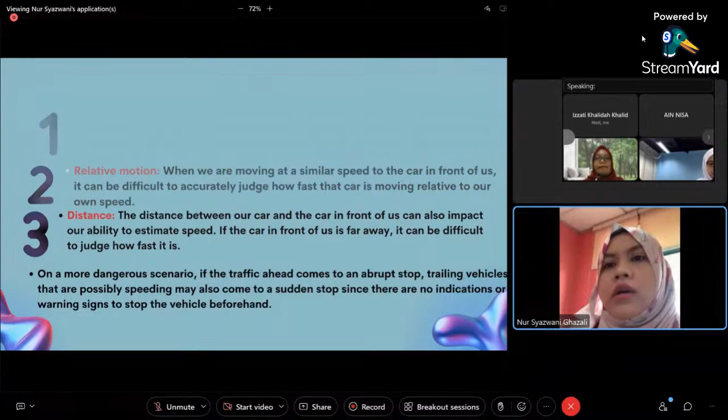Let's take a look at the existing warning system in recent car technology. Forward collision warning system uses sensors such as radar, cameras or LiDAR to detect vehicles or other objects in the road ahead. If the system determines that a collision is likely, it will issue an audio and visual warning to the driver to take evasive action.

This system has become increasingly common in new cars in recent years and is often standard or available as an option on many models. The FCW is very useful when the car is within a certain distance range of the front car. However, this technology cannot work when the car is out of sensing range.

We need to equip automobiles with sensors, which incurs additional costs for users. Other technologies such as the auto braking system also use sensors installed in the car to provide an auto stopping mechanism for the car, and it requires a short range distance to the front car to serve its purpose.

As a summary, for us to use this recent car technology such as FCW and auto braking system, we need to install these sensors into the vehicles. For new cars, it will be no problem because most recent cars already have sensors installed.

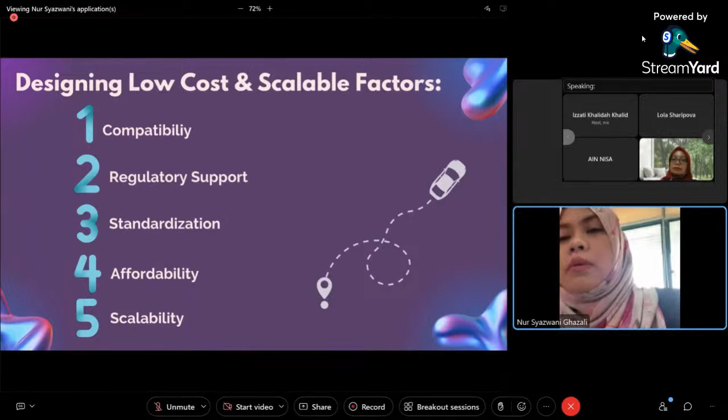Let's take a look at the methodology. There are a few research papers already published on how to calculate the safe distance between the front and the rear car, such as time to collision.

Time to collision is a measure of time remaining until a collision occurs between two objects. It is commonly used in the field of autonomous vehicles and advanced driver assistance systems. In this equation, d is the distance between the preceding and following car.

VP and VF are the speeds of the following car F and the preceding car P, and L is the length of the preceding vehicle. Using this time to collision, we can measure the time remaining until a collision occurs between two objects, because we want to estimate how long and when we should trigger the warning system.

This is the changing process of deceleration. It is divided into time frames: T1, T2, T3, T4. T1 is the reaction phase before performing the deceleration. Phase 2 is the coordination phase between the brake pedal and the vehicle. The combined time of these two phases is 0.8 to 2 seconds. Phase 3 is the stage of deceleration growth, with a value of 0.1 to 0.2. Phase 4 is the stage of stable uniform deceleration.

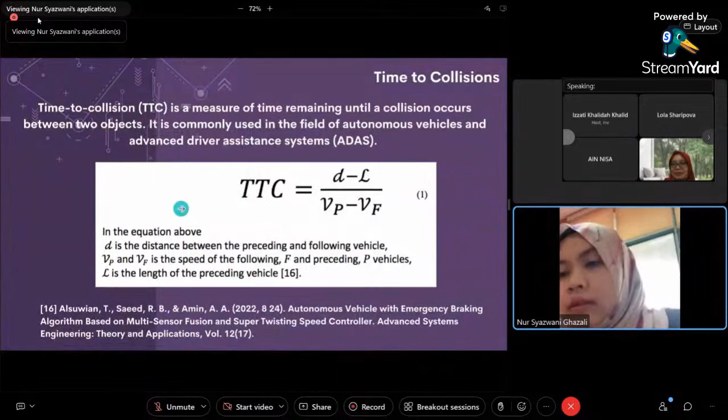T1 is basically the reaction time that the driver takes to perform, to just push the brake.

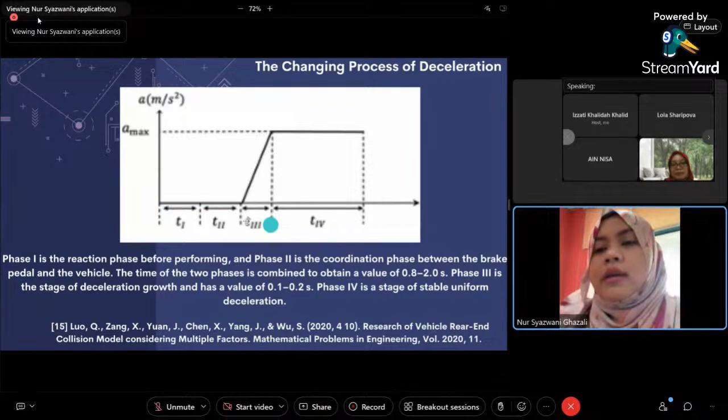Next, this is the formula for the safe distance. The safe distance is given by: (T12 plus T3) over 2, times V naught, where V naught is the difference between the speed of the front and back car. We can estimate the safe distance using this formula.

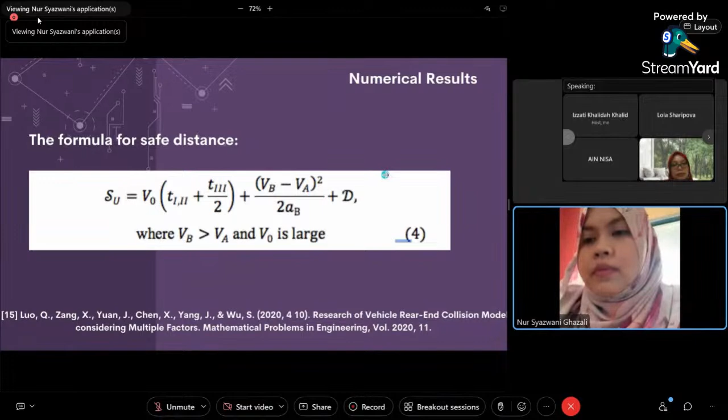By using this formula, we can generate a few cases of reaction time according to the minimum and maximum reaction time. So we create 5 situations according to cases. For case 1, T12 is 0.8 second, T3 is 0.1. For case 2, T12 is 1, T3 is 0.15, and so on accordingly. We change and manipulate these 5 situations to see what happens to the safe distance.

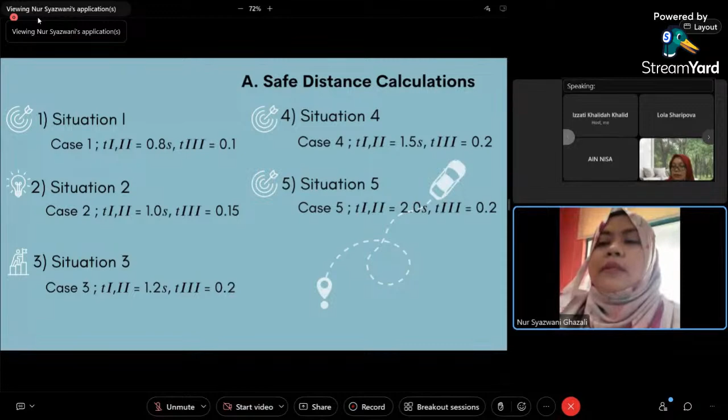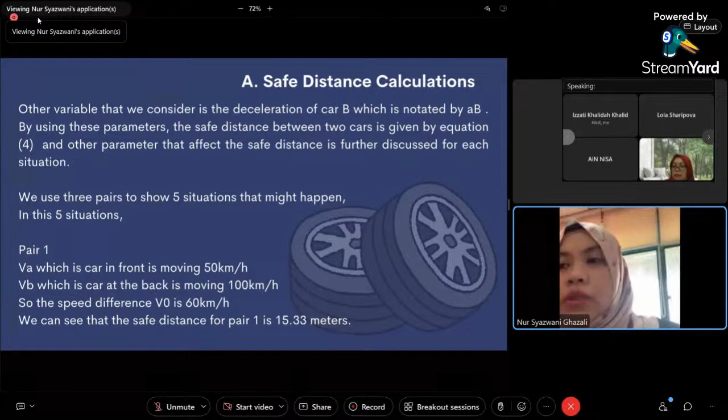Another variable we consider is the deceleration of car B, notated as AB. Using these parameters, the safe distance between two cars is given by equation 4, and other parameters affecting the safe distance are further discussed for each situation.

We use 3 pairs of vehicles, front and back, to show the 5 situations that might happen. In these 5 situations, pair 1 has the front car moving at 50 km per hour, and the back car (VB) moving at 100 km per hour. So the speed difference, V naught, is 60 km per hour.

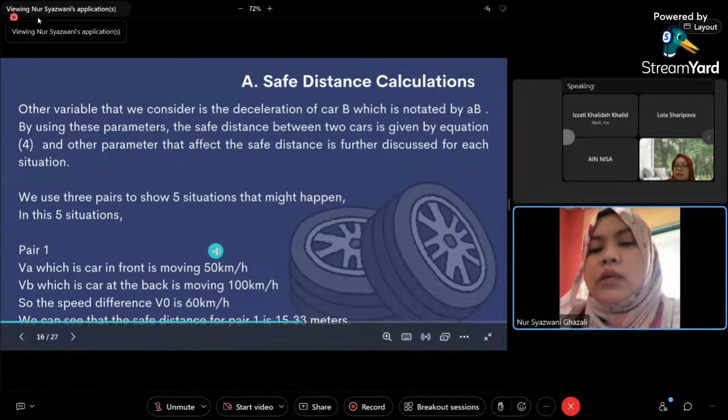We can see that the safe distance for pair 1 is 15.33. If we insert the values into that formula, we get 15.33. We repeat this for the 3 pairs across every situation with the parameters we set. The safe distance reacts to changes in the front car speed and the back car speed. We also manipulate the reaction time, which gives different safe distances.

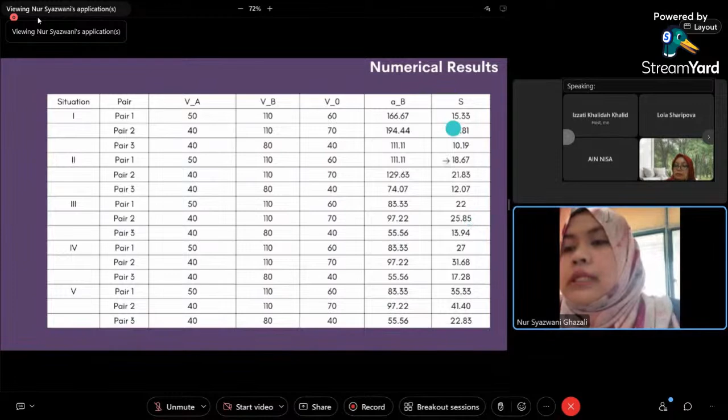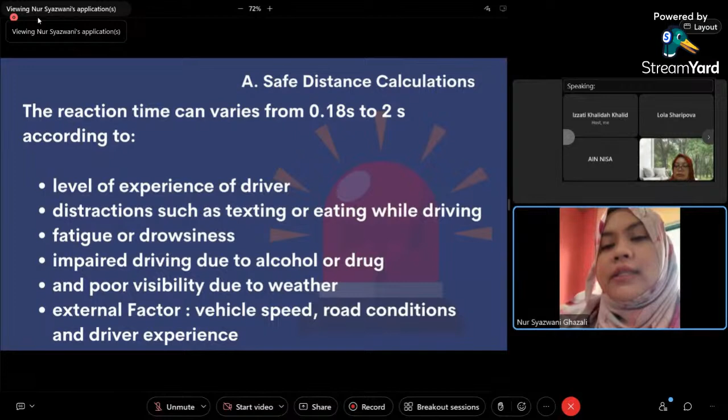This is the result for the safe distance. The reaction time can vary from 0.18 seconds to 2 seconds according to the driver's level of experience. Other factors include distractions such as texting or eating while driving, fatigue or drowsiness, impaired driving due to alcohol or drugs, and poor visibility due to weather, plus external factors such as vehicle speed, road conditions, and driver experience.

To assist safe distance estimation for drivers, an algorithm that would automatically trigger a warning system for rear-end collision avoidance is proposed. This algorithm serves as a guideline for developing a novel mobile application on smartphones. The warning system aims to reduce human error in rear-end collisions. The proposed algorithm is to be programmed and installed as a mobile phone application for each driver.

Once the user installs the application, they need to turn on their location before they start driving. The application will detect the user's location using GPS, and it will calculate the parameters input between the user's car and the front car.

This is the implementation of the protocol and how it works. The input for each application or user will need the speed of the front car, speed of the user's car, deceleration of the user's car, and distance between car A and car B. Then you can calculate the safe distance using equation 4.

If the distance is greater than the threshold, or the safe distance calculated, the system keeps calculating the safe distance. If it violates this condition, it will automatically trigger the alarm to alert the users. This is how it works, and this is the algorithm.

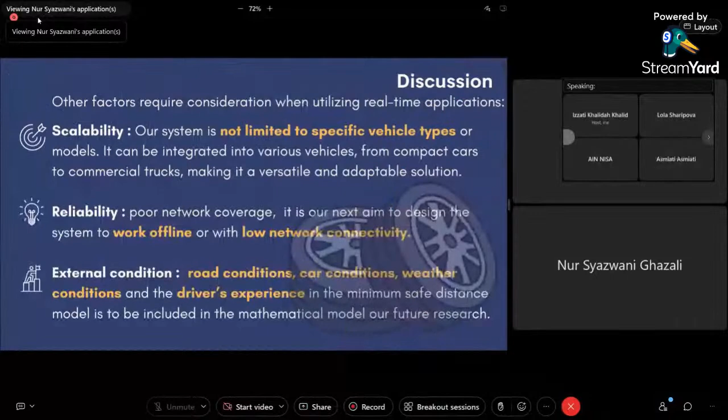various vehicles, from compact cars to commercial trucks, making it a versatile and adaptable solution.

And then reliability, we need to consider when the network for an area has poor coverage. So it is our next aim to design the system to work offline and with low network connectivity.

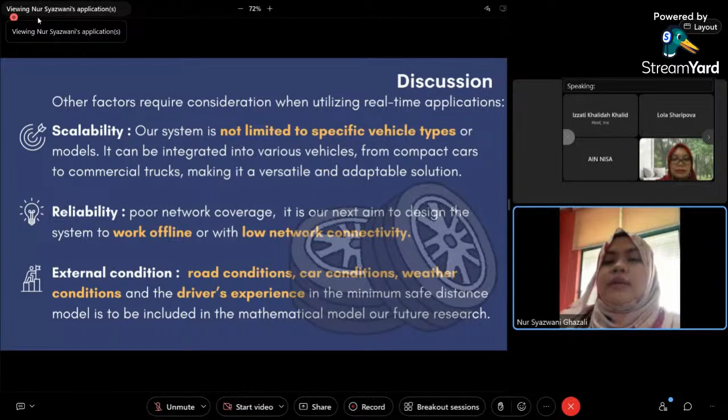And then other external factors that we need to consider, maybe we can improve the mathematical modeling, such as road conditions, car conditions, weather conditions, and the driver's experience in the minimum safe distance model, to be included in the mathematical model for our future research.

Okay, so conclusion: this article presents the latest progress of automotive technology in collision detection mechanism. The proposed mechanism ensures a cost-effective and scalable rear-end collision warning system, with emphasis on the advantages of incorporating it into mobile applications using existing sensor mechanisms in mobile phones.

The proposed algorithm's primary objective is to mitigate human error in rear-end collisions. By using mobile technology, the system is cost-effective and easily adapted across various car models. Also, by prioritizing factors such as compatibility, standardization, scalability, and affordability, this research demonstrates the algorithm's seamless adaptation for mobile phone application.

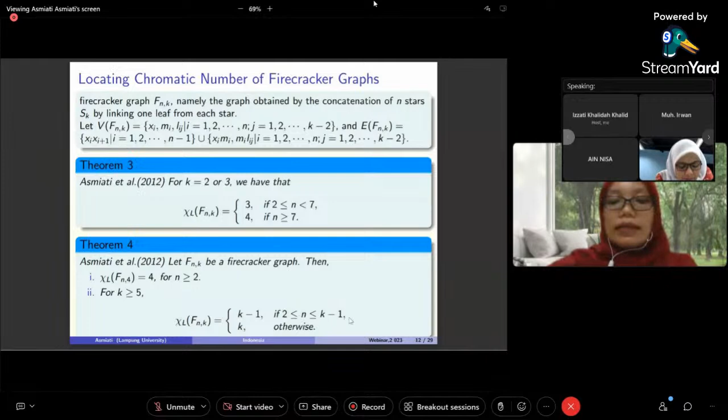And especially for K equal to 4, we have locating chromatic number 4 for n greater than 2. And for K greater than or equal to 5, we have two cases: K minus 1 for n between 2 until K minus 1, and K otherwise.

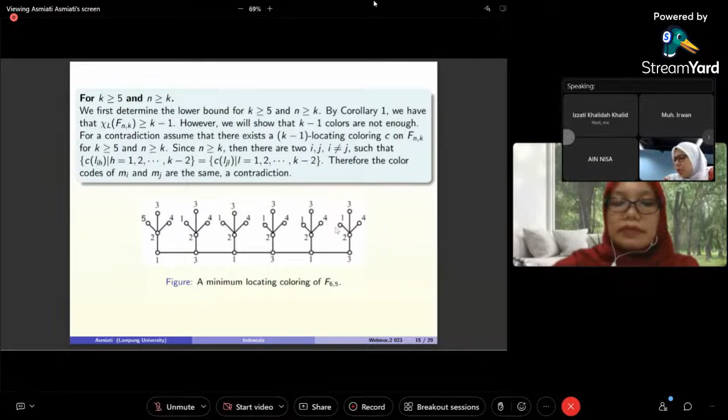Now we discuss the locating-chromatic number of barbell graphs. The barbell graph is constructed by connecting two arbitrary connected graphs G and H by a bridge. Barbell graph B(M,N), where G and H are complete graphs on M and N vertices respectively.

We have theorem 5: the locating-chromatic number of complete graph Kn is N, because every vertex on the complete graph is adjacent to every other, so each vertex must be assigned a different color.

And theorem 6: the locating-chromatic number of barbell graph B(N,N) is N plus 1.

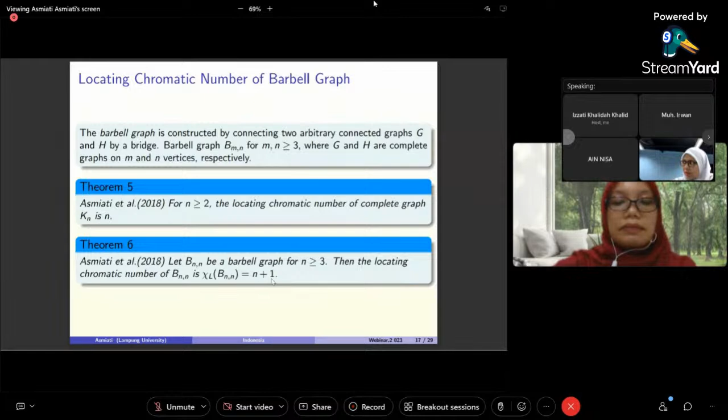To determine the lower bound, we note that barbell graph B(N,N) contains two isomorphic copies of a complete graph Kn. By theorem 5, we have at least N colors. Suppose that C is a locating coloring using N colors; it's easy to see that the barbell graph Bn contains two vertices with the same color codes. So it is a contradiction, and we have at least N plus 1 colors.

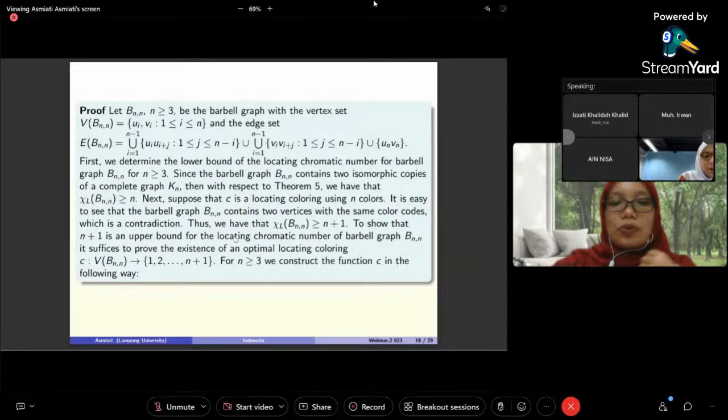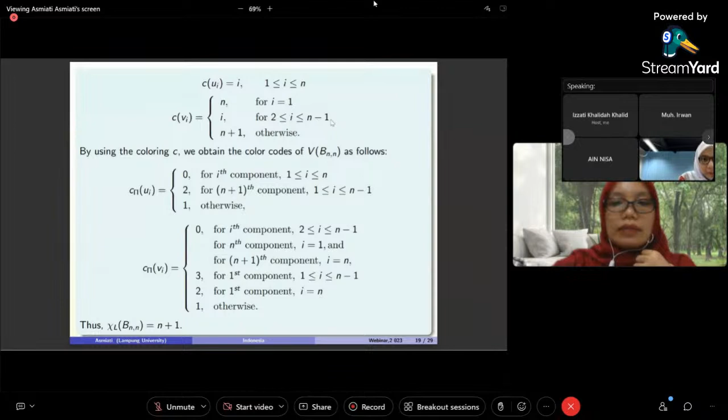To construct the upper bound, we give color Vi as N for I equal 1, I for I between 2 until N minus 1, and N plus 1 otherwise. For example, we have a barbell graph B(6,6). Barbell graph B(6,6) contains two of the same complete graphs K6, so we need one more color to make sure that the color codes of our vertices are different.

With theorem 6, we have corollary 2 for M not equal to N. The locating-chromatic number of barbell graph B(M,N) is maximum of M, N.

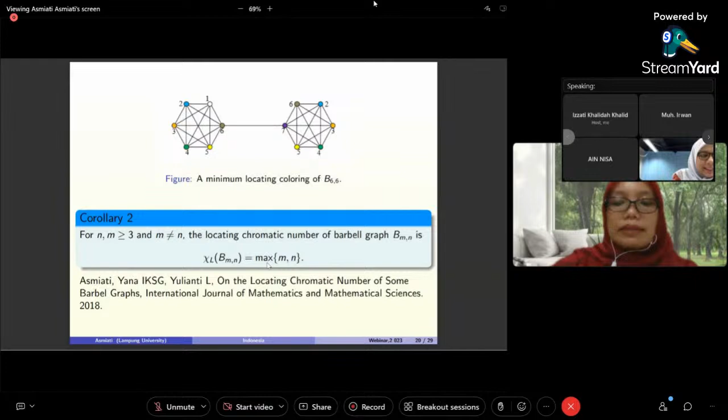Now, the locating-chromatic number of origami graphs. An origami graph ON is a graph with the set of vertices Ui, Vi, Wi, and the set of edges we have like this.

Then theorem 7: we have the locating-chromatic number of ON is 4 for N between 3 until 6, and 5 otherwise.